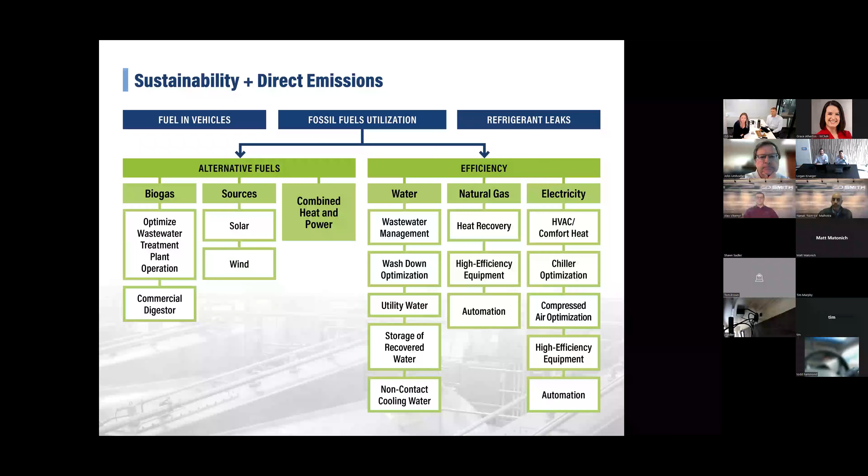Second item is those indirect emissions. They're just as important in the model, and identifying, for example, that every sustainability plan is going to look at indirect emissions a little bit different. It's important for you to understand how those are going to impact the sustainability plan.

A good example of that is electricity. Midwest purchased electricity is often 40 to 60% coal-based, and the emissions are calculated as such. Several electricity suppliers can now provide and document 100% wind-generated electricity for a couple of cents a kilowatt. But on paper, that could mean your purchased electricity is 100% wind. Does that fall in line with how your sustainability plan is written? And could that work into your model?

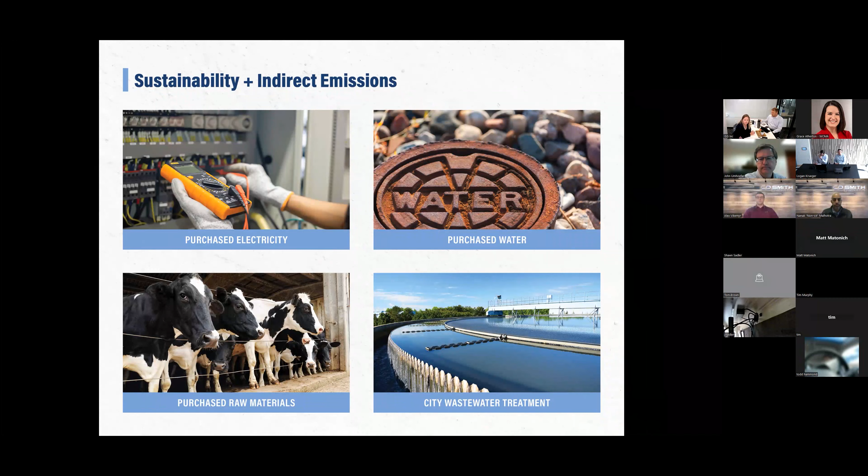That helps us focus on some of those indirect and direct emissions. Does this work in your model? We can also recognize the impact of emissions from the farm and how that impacts the total sustainability plan. Again, establishing those metrics arms the facilities with the information necessary to start those conversations.

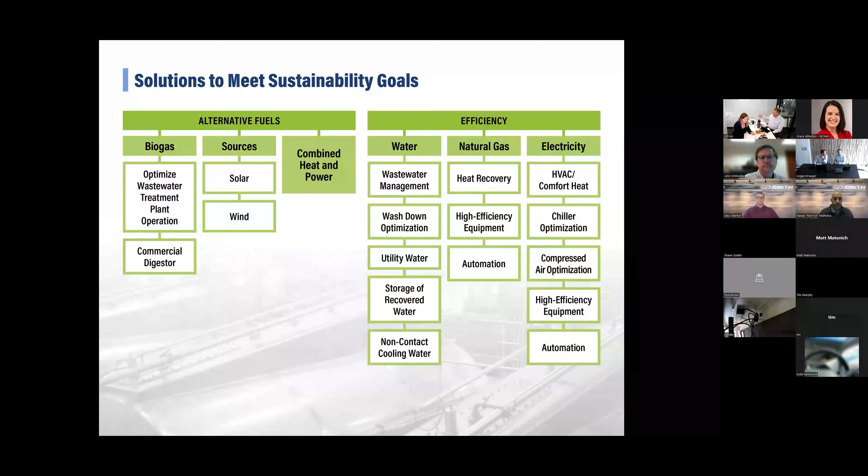Finally, bringing all these metrics together, we can now work on solutions and establish a roadmap. There are real efficiencies and justifiable projects in automation, for example compressed air optimization and high efficiency equipment. Those are real numbers we can put numbers to. So let's look at a couple examples.

You can also understand that those metrics are really important. In order to hone in on some of that technology, we had to look at the trends and understand where we were utilizing this energy. We understand that some of this was seasonal relative to cooling and heating cycles, so that's going to change the different types of technologies that you can look at.

This allows us to put together an overall sustainability roadmap in which we can look at different technologies, for example geothermal cooling, and understand what that capital cost improvement would have, any impacts on operation costs, and if there was natural gas offset, as well as the CO2 equivalent offset that would be produced over the year. This now arms the facility in being able to make good and valid decisions on moving forward with our construction projects.

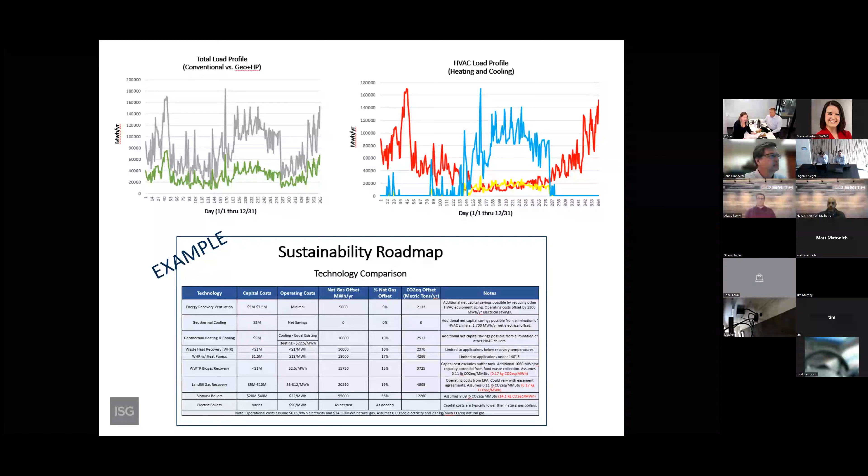In summary, that sustainability roadmap allows a facility to look at whether it's a remodel, a new facility, or anything, looking at different technologies and understand what that means for your CO2 equivalent offset. Again, that metric ton, however it's written into your sustainability plan, as well as understanding the other definition of sustainability, meaning that we've got to make sure it's got a good payback and that it can look good in the long run for our bottom line.

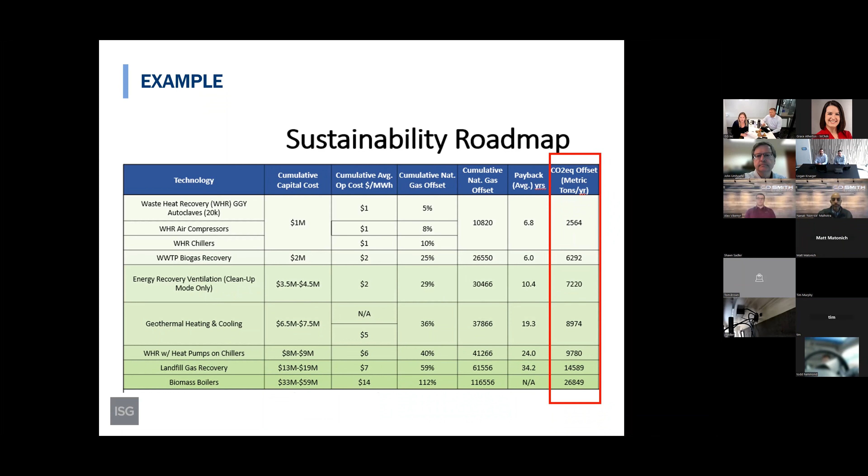Just wrapping up here quick, some of the technology used to help in the design of these projects starts with some 3D scanning. We're able to quickly and accurately capture as-built information of existing facilities, specifically in GMP areas, where it's a non-obtrusive way to get into the space and get accurate documentation that we can then bring back.

We use the scan data to accurately take measurements and reference back to what conditions exist within the existing facility, but then also build that into the 3D model we're using for the design so that we have as accurate drawings as possible, which then builds into being able to work with construction partners like Miron and C.D. Smith to share those models in further development and planning for these facilities that are highly complex. There's a lot going on to do a better job of planning.

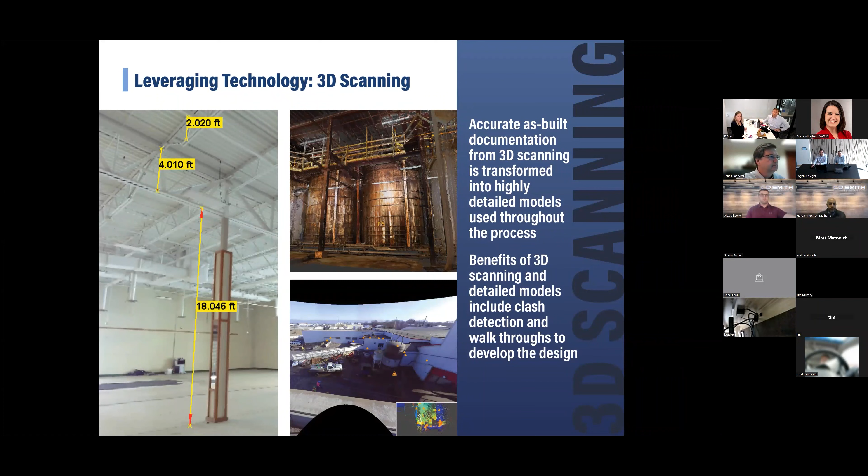An additional item that has proven useful for us in leveraging that technology is LiDAR for aerial surveying that is survey grade, as well as thermal imaging, to very easily and quickly diagnose potential issues within a facility from the exterior in hard to access locations, and be able to target some potential problem areas without a lot of extra work. Just a couple quick examples of other ways we're leveraging that technology as well.

Key takeaways from a sustainability standpoint: number one, establish the goals. Number two, identify and prioritize solutions. And three, implement the solutions. Appreciate the opportunity to talk to everyone today, and we'll turn it over to John and to the next group.

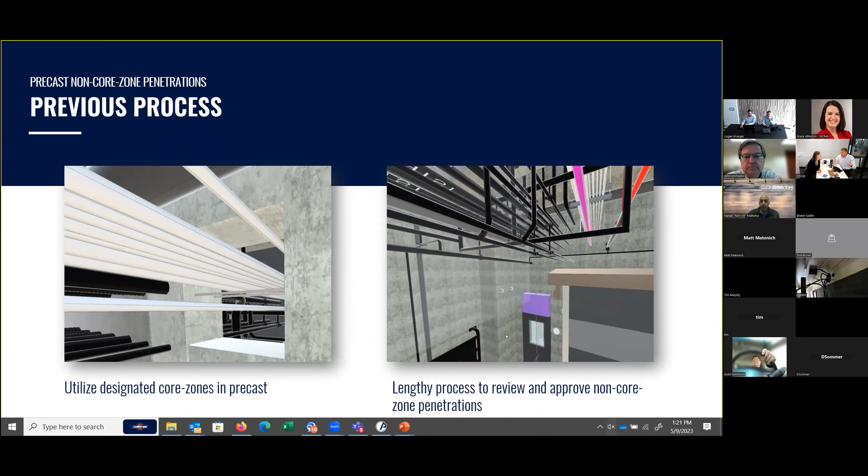So currently, that's a really lengthy process to review and approve those non-core zone penetrations. What happens now in the field - we can go to the next slide now - our trade partners will get the information that they need, start trying to figure out during our BIM coordination process where that routing is going to go, trying again to hold to the design intent as much as possible.

What typically happens then is they find the area that they need to core through, and they'll submit an RFI to the engineer. Typically they're doing this based on the construction documents that they have in front of them - elevations from the architect and engineer, showing a location. That information then goes back to the precast concrete engineer. Unfortunately, they're typically referring to a different set of documentation in terms of what the actual ID of the plank is, where that's located. So oftentimes they'll request additional information and have the trade partner mark up the actual shop drawing or pour drawing from the precast supplier. That gets marked up, and the engineer reviews that.

Oftentimes, they're just marking a hole in there, not really knowing what's going on from a reinforcement standpoint. So there's often a lot of back and forth conversation with that. This process can last anywhere up to two weeks typically. Our project management team asked us if there was any solutions to try and come up with, to not necessarily mitigate this process, but certainly reduce the time it took to get this information in front of the right people at the right time.

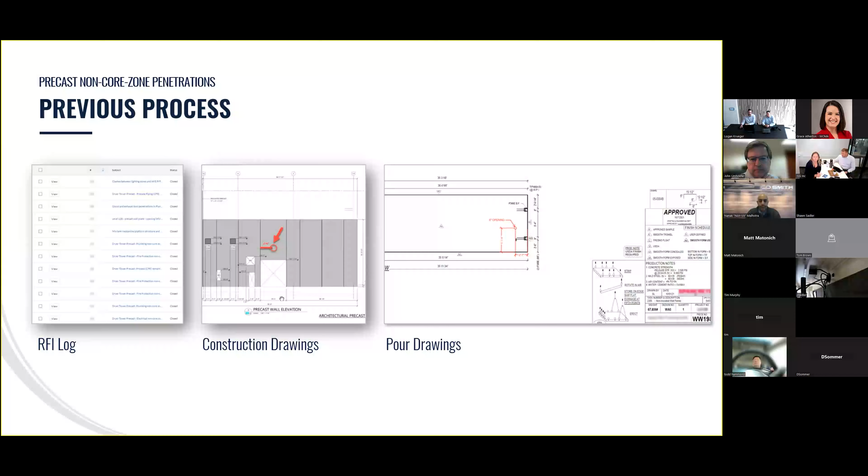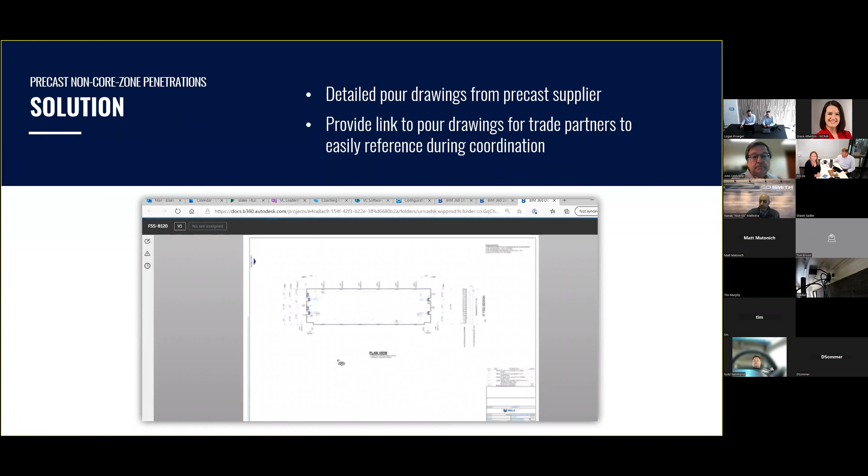So what we've done in-house in our virtual construction department is we've taken the models now that we get from the precast suppliers. It's an interesting note, 5 years ago we probably weren't in a position with most of our precast suppliers to do this, but now many of them across the country are creating pretty extensive 3D models of their precast plank. Not only is the model constructed showing what's going to happen from an overall building standpoint, but those models have detailed parameters, like what the plank ID is.

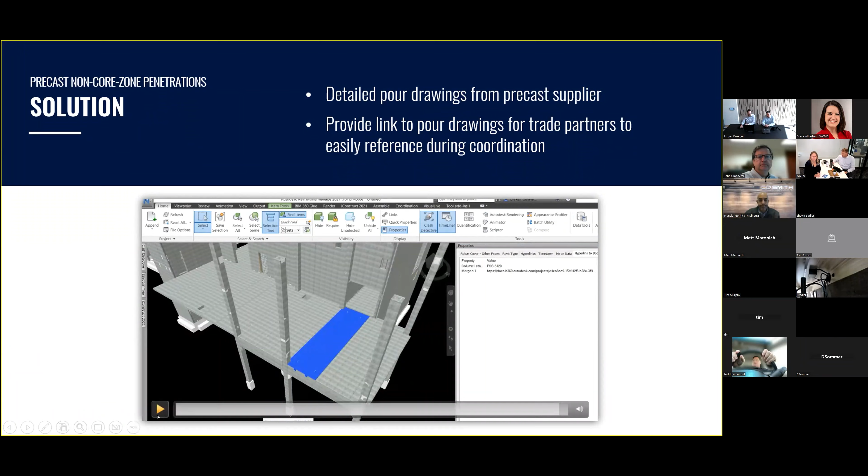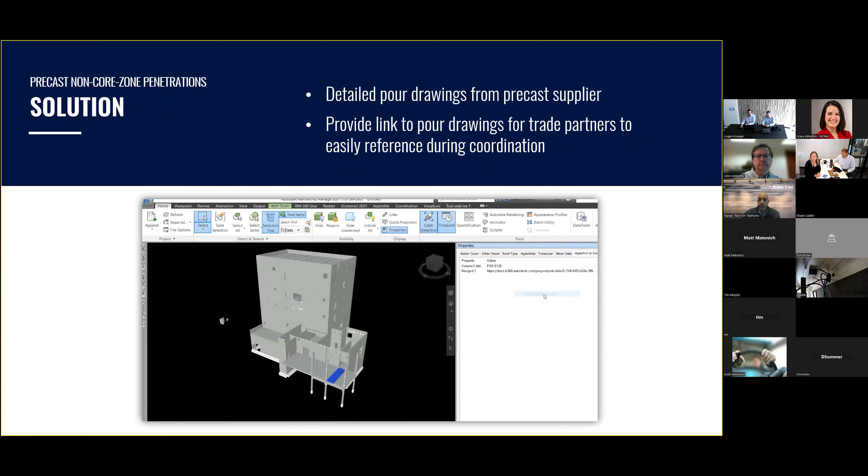To expedite the process, they're marking up those pour drawings and sending them to the precast engineer. So now we have an engineer who understands what document they're using, exactly where it is in the project, and what the implications are of that requested drilling location. We've taken a process that typically lasted 2 weeks, and brought it down to a day or two for turnaround, which is invaluable to our schedules and our coordination conversations.

So the benefits are, as I highlighted before, the first one is we're now putting our trade partners in a position where they're reviewing the precast plank and understanding the implications of the area they're looking to drill through. So we're not asking an engineer if we can core through a spot where they've got a ton of reinforcement critical to that plank structure. Some of these reviews are showing that maybe it's a better idea to push this routing somewhere else and get back into that core zone.

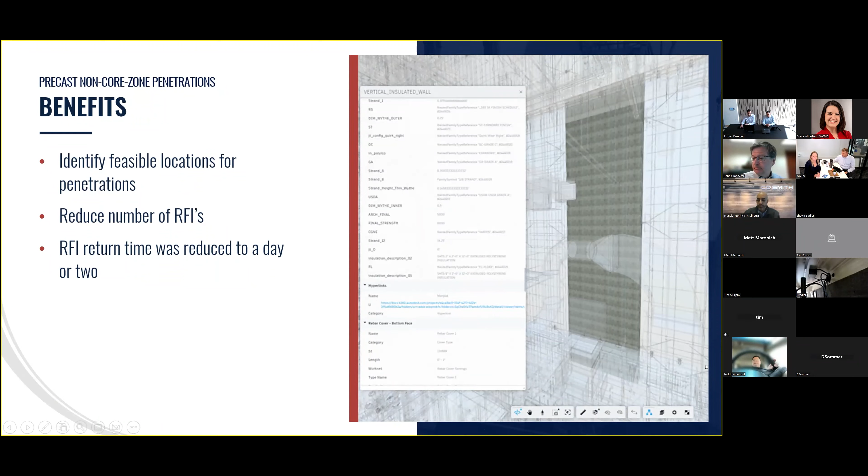I think it reduces the number of maybe unnecessary RFIs. And the biggest factor in this whole thing was the reduced turnaround time in these discussions. So it's not back and forth, it's information being provided in the right place at the right time, drastically reducing the time it takes to get these RFIs approved.

Along those same lines, trying to leverage this coordination effort going on in the BIM process, we try to utilize that model information when it comes to verifying where things get installed in the field. The previous state was that we would do the BIM coordination process. When we got an area coordinated, the trade partners would produce installation drawings and we would sign off on that area, meaning we're coordinated and these systems are going in specific places. Now we're giving documents that we distribute to our field teams to show them exactly where to install our systems, whether that be hangers, racks, piping, ducts, or all of the above.

What would happen on large projects like this is things move at breakneck speed. There's a lot of people in that facility during construction, and inevitably something gets installed potentially not where those coordinated or signed-off installation drawings indicated. In the past, for our field team to figure out what's actually going on, they would use the 2D installation drawings, either printed or on a tablet, and then have to look up at a spot to see if something was installed in the wrong location.

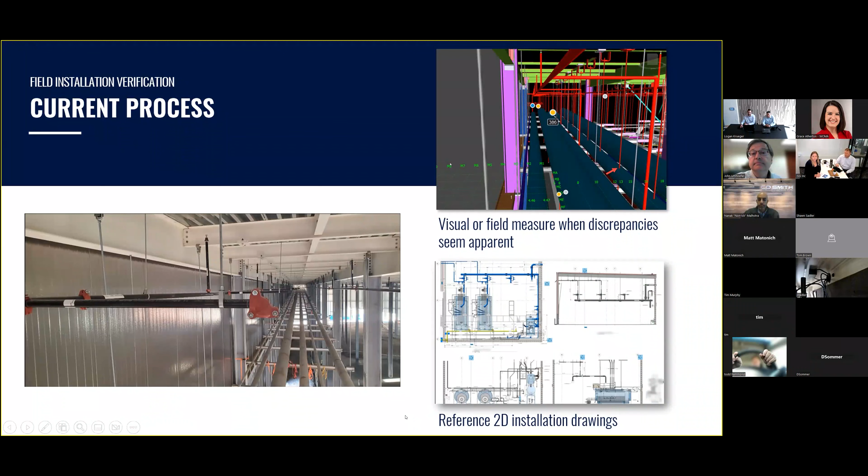That process took probably weeks to get some measurements up there, get a lift up there that was approximately 28 feet off the finished floor. So it was just a really long, drawn-out discussion to figure out what the actual challenge was.

So what we started implementing with our teams recently is utilizing augmented reality. High level, what we're doing is taking that coordinated model that everybody's signed off on, loading it up to a space where our field teams can access it with their iPads. In that model, we have targets located throughout that allow us to place a target in the field at a known specific location. We're aligning that target with the model on our iPads, and it's allowing the model content to align with the actual built environment. Effectively, we're overlaying our coordinated model on what is already installed in the field.

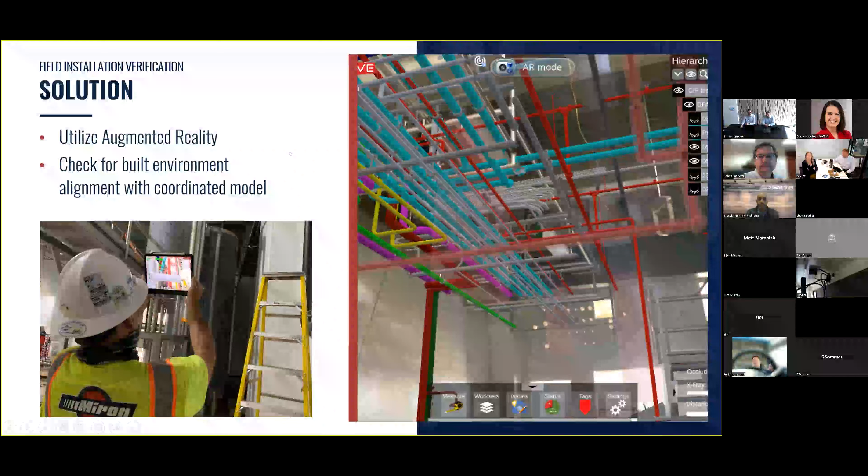In this particular image, you can see there's holes in the precast plank, and right now we're seeing the pipes that are installed there, or what was coordinated to date. Our field team, in this instance the superintendent, was able to take the iPad, show what was in the coordinated model to date, and show that these pipes were actually lining up with the holes that were drilled in the precast concrete plank. Pretty neat stuff.

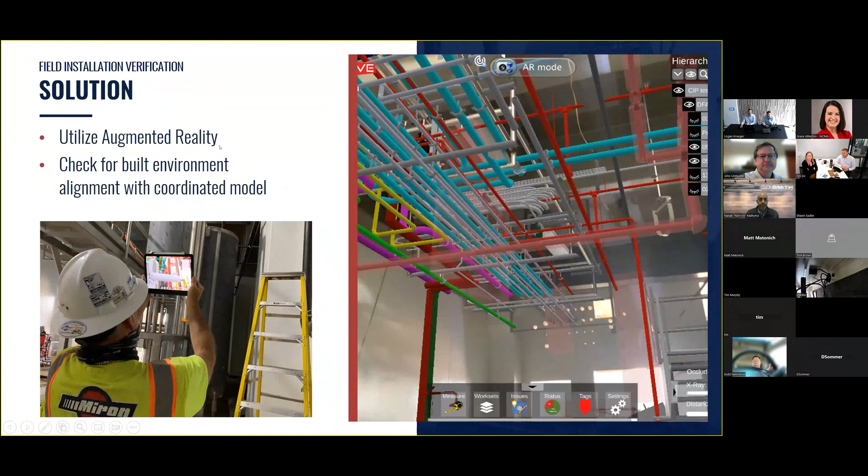The obvious benefits of this—and this was kind of our target for all this—is to quickly and easily identify who is responsible for any discrepancy we see in the field. So if a pipe, duct, conduit, or hanger is placed in a spot that wasn't coordinated initially in our process, we're able to identify what system that is and who's the owner of that system.

It also reduces the verification time in the field, and the discussions and additional meetings we have to have. As I pointed out before, that particular instance with the fire sprinkler system and the refrigeration pipe was not in a convenient spot to get to—you had to be on a lift. We're talking 200 feet of racking. So there were a lot of factors, and just the time frame to document what's incorrect or what's actually there, convey that back to the team, and then have discussions—that can add weeks to that particular challenge.

In this instance, using that augmented reality and the coordinated model speeds that process up. It takes out that element of trying to figure out who's responsible—it just makes it crystal clear as soon as you're looking at things, and changes that focus from whose fault is this to here's the situation and how can we resolve this.

You are muted at the moment.

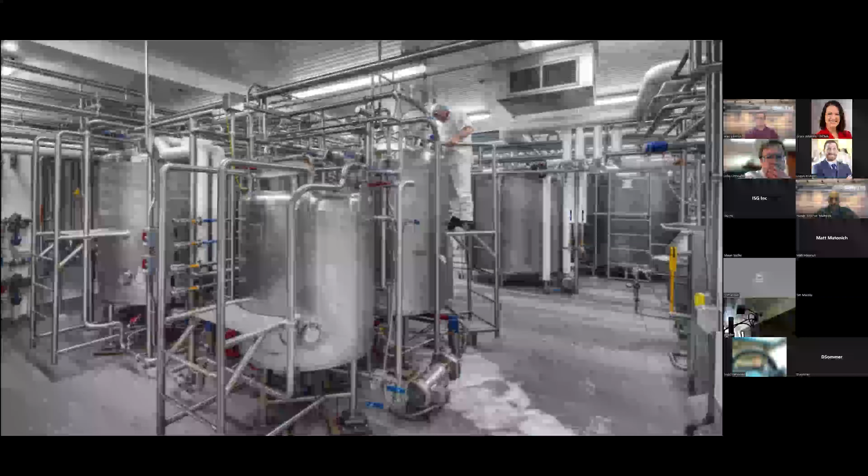Next, we'll jump up to the first floor. This is what the typical process space looks like on both sides of CDR and dairy, but this instance is CDR space. This is their new raw room. I'm sure you noticed the very large batch tanks and miles of process piping and utility piping. So a lot of equipment, a lot of large equipment to fit within the space.

Another highlight piece for CDR was their new conference room that actually looks into some process area and also provides a nice view of Lake Mendota on Madison's campus here.

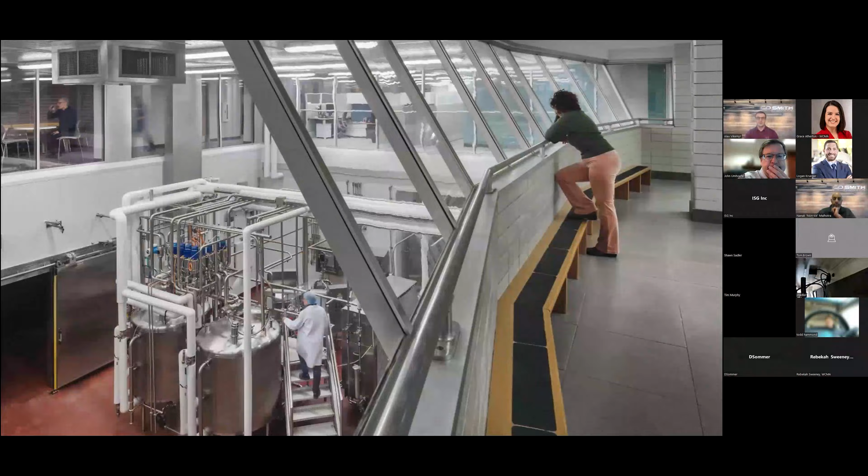This is where the two spaces blend. The individual on the right-hand side is actually on UW or Babcock Hall's observation deck that overlooks the dairy plant. On the left side of the photo, you see new office space for CDR, which all overlooks Babcock Hall's new dairy plant.

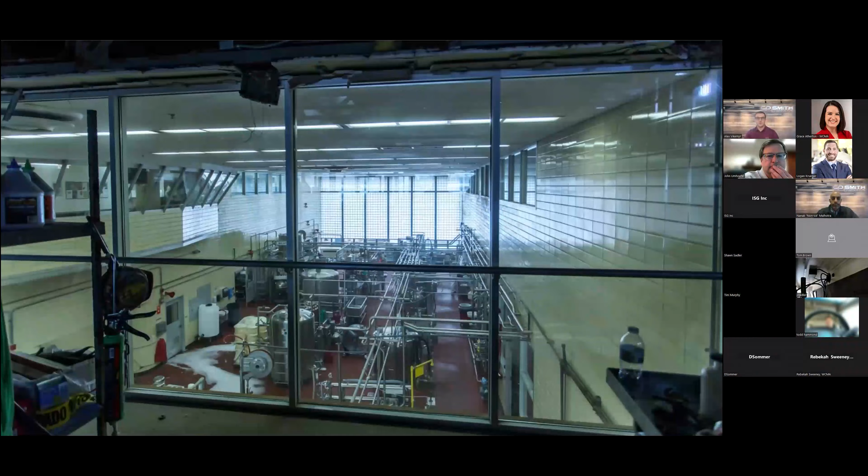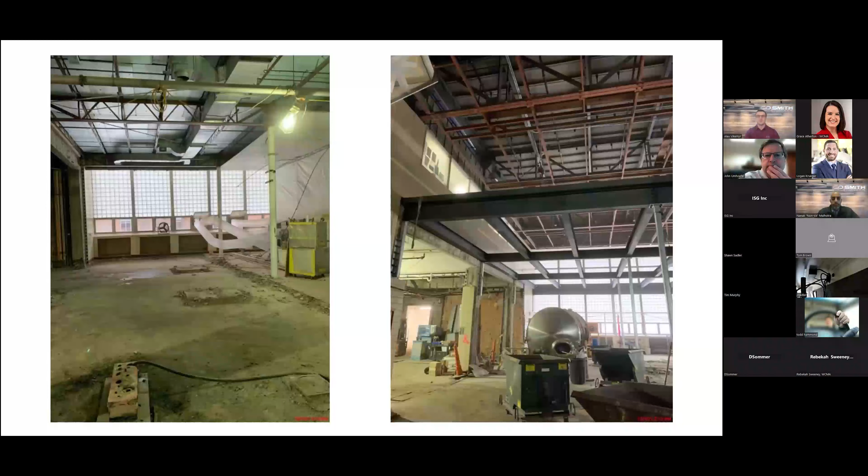Both sides are pretty similar, with some slight differences in there, but I think it was pretty cool to look back on pictures while putting together the presentation and remember some of the old details and challenges that we faced.

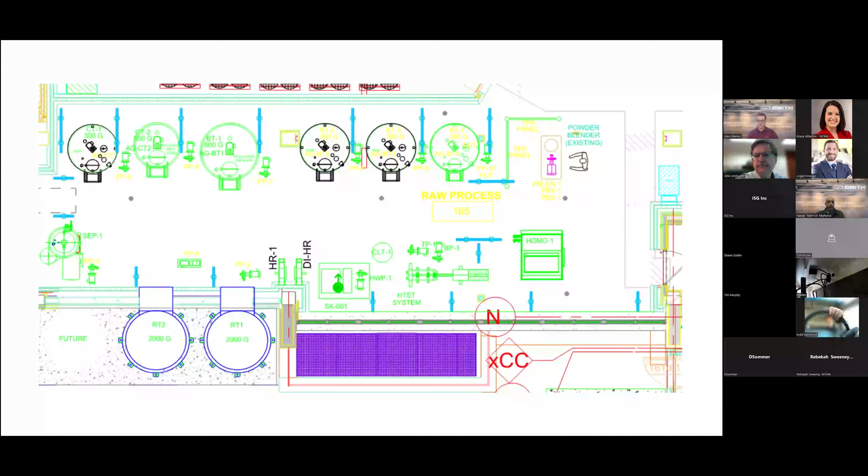Another example of really preliminary planning before some equipment arrived was this new spray dryer, for example. This particular piece of equipment came all the way from Denmark. So there was a ton of coordination that happened before its arrival, and we planned out where we needed to actually leave out a portion of the exterior wall to be able to slide that piece of equipment inside. And then also we had to plan out an opening through the roof so we could pick and tilt at the same time, and stand this unit up within the room, just due to spatial requirements.

So definitely very challenging given that the equipment came from Denmark, but early in the project, it was identified as having the longest lead time for fabrication and delivery. The international procurement was certainly new to me, as the shipment required a lot of planning and coordination between the export in Denmark and import in the US, all the trucking to get it here, procurement time for customs reviews and port fees. All those tasks played a vital role in developing the schedule for this piece of equipment and integrated into the construction project schedule as well.

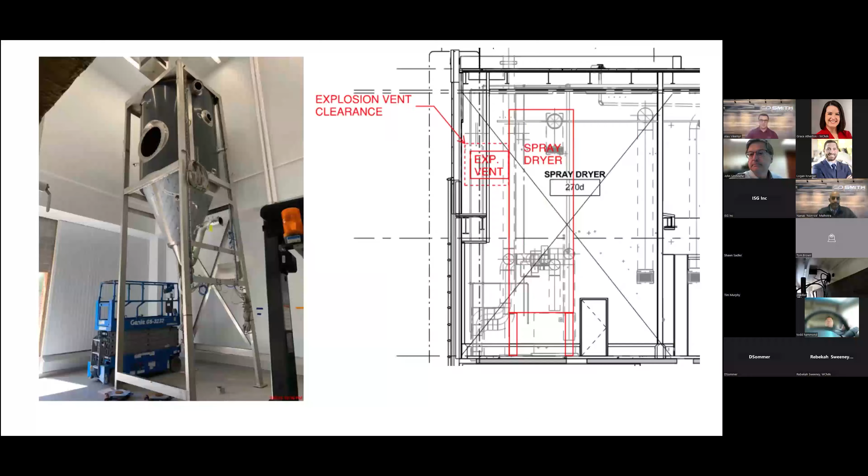The electrical components on these were more of a particular discussion point because when we reviewed all the necessary utilities for it, European equipment doesn't quite line up with the United States UL listing. Much of the NEC electrical codes were similar, but the units did not come with a typical UL stamp like what we have here in the US. Anything we plug into an outlet, such as your iPhone charger, has a little UL stamp on it. These units did not arrive with that stamp on them. So after many discussions with various inspecting agencies, some field modifications were needed to address the electrical concerns with this equipment to ensure the safety of the end users and the electrical design capacities in mind.

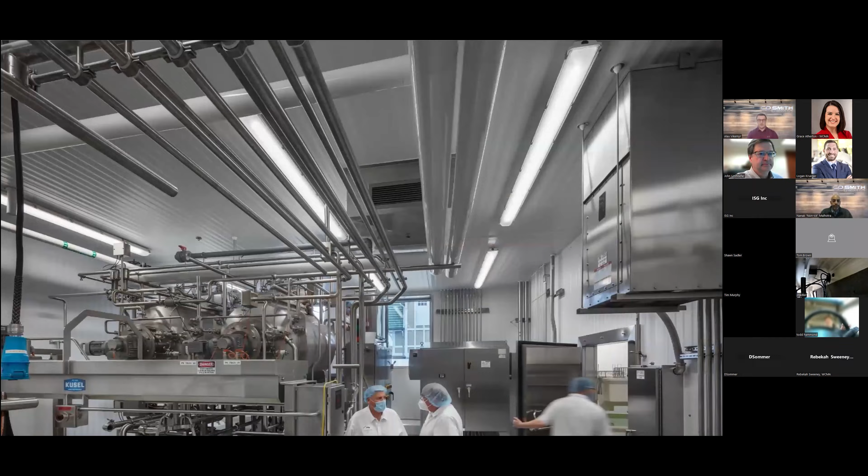One last thing more on some electrical equipment - this is CDR's new process space. What your eyes are probably more drawn to is the HTST system right behind the Kusel tables there on the left. But what I want to point out are a couple electrical cabinets and step-down transformers here on the right-hand side.

Much of the equipment in this building had different varying types of electrical service needed, and some electrical cabinets and step-down transformers were needed to accommodate the supply of electricity to various pieces of equipment. So much of the planning effort to find a space for those to reside was a challenge, but we were able to do so after outlining all the equipment's location on the floor plan, and then began to build out more of the ancillary accommodations for the equipment. The spaces were integrated with all the components to still have all working clearances and electrical clearances around them as well.